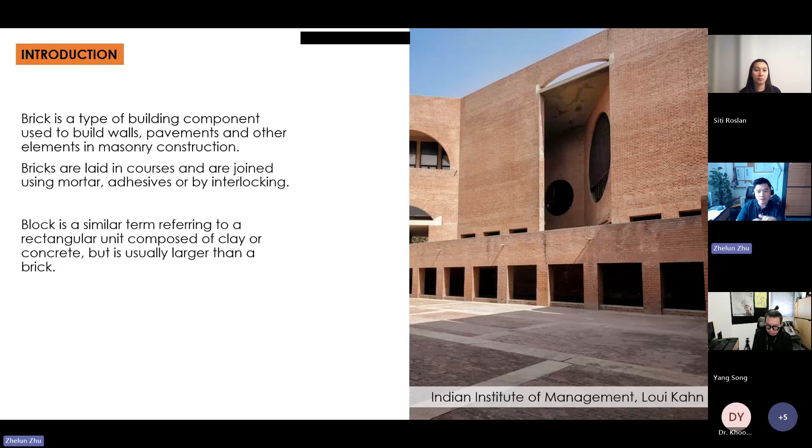Mortarless brick construction is usually achieved via an interlocking system, and it has several advantages: increasing construction productivity, reducing construction time and labor, and consequently reducing construction cost. Because of its technological simplicity, mortarless brick construction is more appropriate for many local communities than conventional mortared brick techniques—as you can imagine from the Lego system, how easily it can be built, or how we can have fun putting together these small pieces.

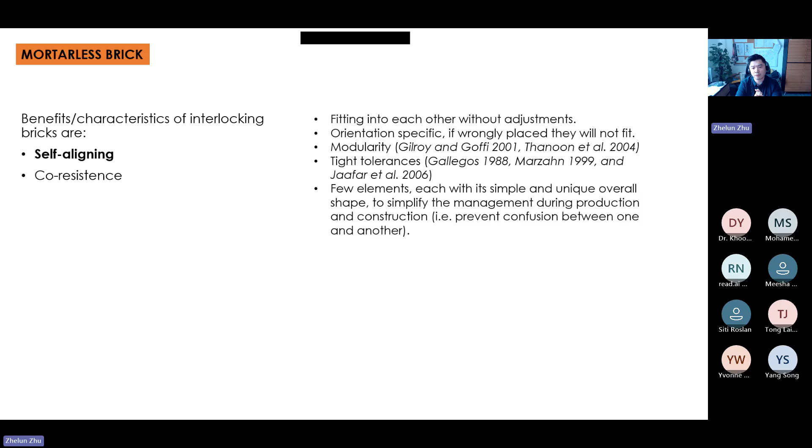Benefits and characteristics of interlocking bricks are self-aligning, so they can fit to each other without any adjustments, and they are orientation specific, so they will not fit if wrongly placed. They are usually modular, and have very tight tolerances. Usually they feature few elements, so you will find a lot of similar elements, because in the interlocking system and mortarless mechanism, we need to simplify management during production and construction, for example to prevent confusion between one and each other.

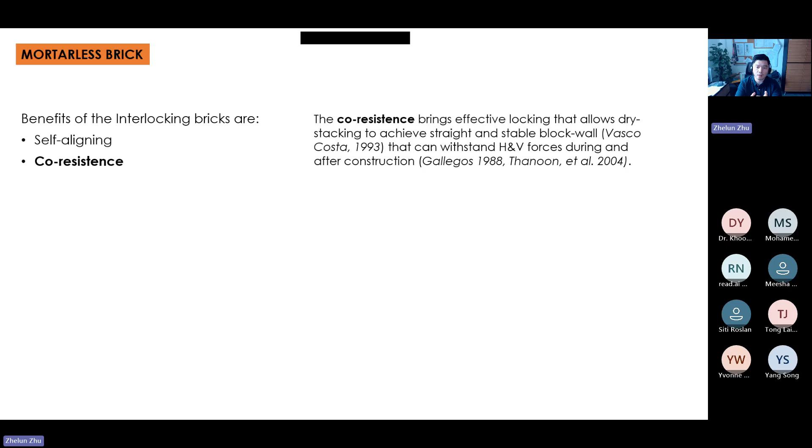On the other side, they feature co-resistance, meaning the effective locking allows dry stacking to achieve a straight and stable block wall that can withstand vertical and horizontal forces during and after construction. So all the bricks are interlocked together, they work as a system, they collaborate to bear all the loads. This is for co-resistance.

We have also many explorations of interlocking systems, and this is done by Dr. Hao Hua from Southeast University. They have designed small types of blocks, and they interlock to each other with this mortise and tenon system to form a wall.

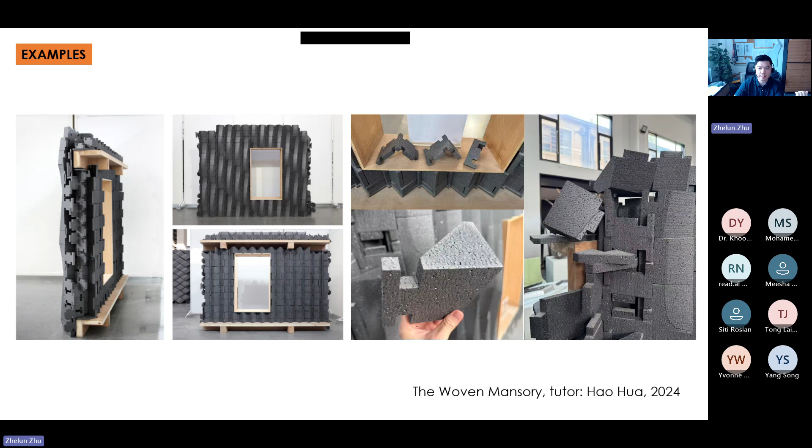We also have many modern architecture examples using interlocking systems, and this case is the Metropol Parasol in Seville. In this case they adopted a waffle structure to combine these panels together via interlocking system.

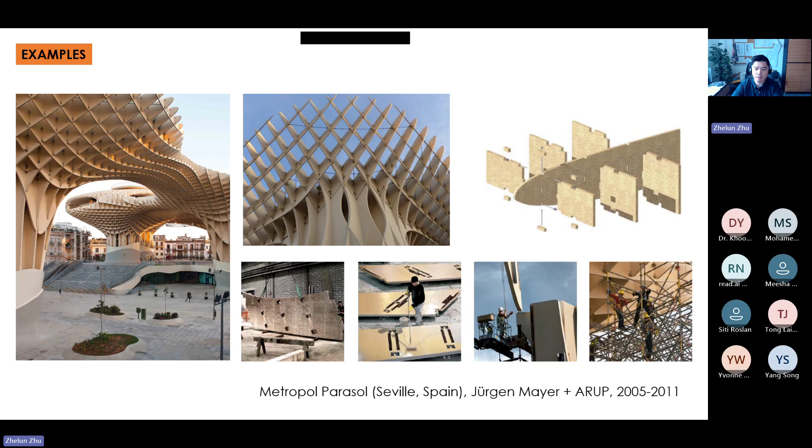You can see the shape - the overall shape is quite ambitious, but each component is quite simple, as their panels, and they use a digital fabrication process to shape these complex curves. These are more examples of interlocking systems via waffle structures.

In terms of application in space, it's really interesting that we are exploring how we are going to build in this extraterrestrial environment, and how we can use in situ materials like lunar dust to 3D print building components. This is an example from Norman Foster and Partners for the Moon Village.

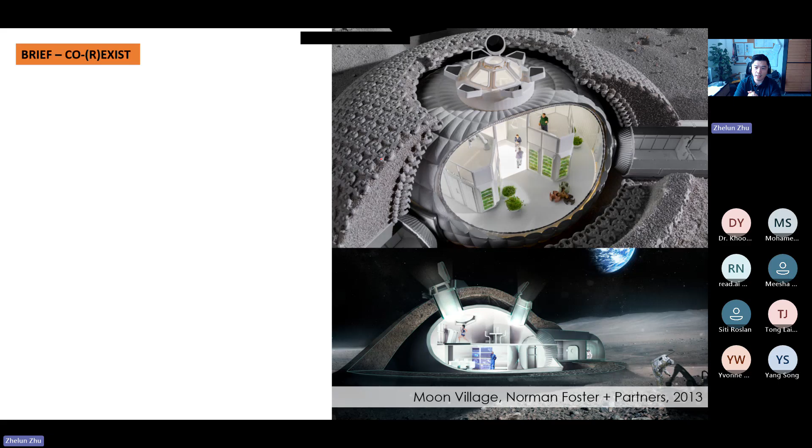They are trying to use 3D printing to build small elements, and as you can see, they can interlock to each other to form this shell for future space settlements. This application of using traditional techniques via modern construction strategy is actually very cutting edge and has a large application.

So what we have done in the last semester at XJTLU is we asked students, in particular in my groups, to design an integrative system formed by interlocking bricks via digital design and fabrication process. Students designed and built a pavilion, approximately 3 by 3 by 3 meters, using this system, so all elements must be geometrically interlocked with each other.

We asked students to use hot wire cutting of EPS panels, using the equipment we have here in the Department of Architecture, in particular a 6-axis robotic arm, and hot wire equipment of size 65 by 45 centimeters. So the EPS panel material is of maximum size 1 meter, and 60 centimeters in width and breadth.

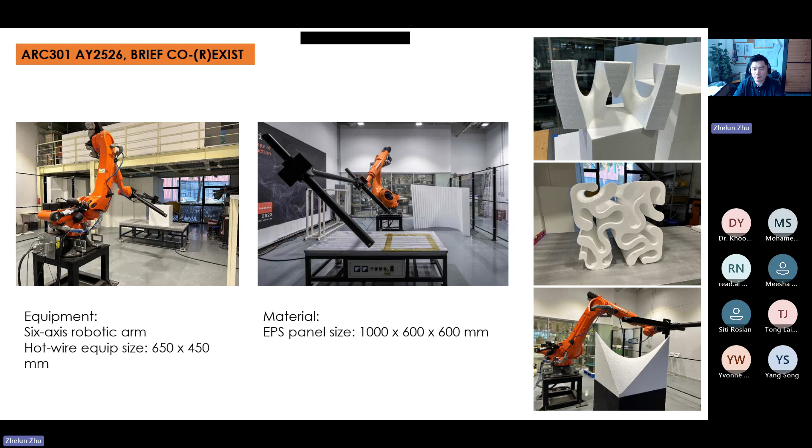Here are some examples of what the hot wire technique can do, and as you can see, we can shape different and very attractive forms using these techniques.

So you can see all these groups work with each other, similar to real construction groups, and they need to establish regular meetings with each other to check progress and communicate what is affecting who.

So here are the results. We start with the material study - we investigated the EPS panel material, exploring the density, mechanical properties, maximum load bearing of this material, as well as comparison with other materials, and the benefits and advantages that this particular material can bring.

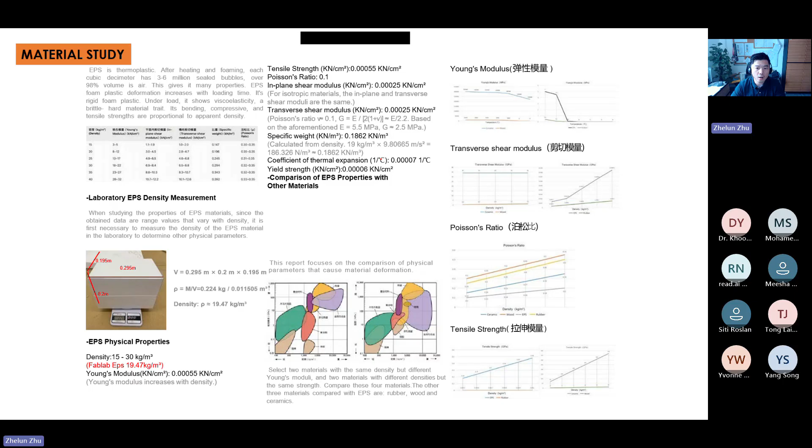We have also investigated different mechanical and structural performances of the material, checking the maximum load-bearing performance of this material in order to design an appropriate shape for the proposed system.

Students also run a case study with similar materials or other shapes. In particular, we explored the traditional tenon-mortise system here in China, and from it we extracted inspiration for our interlocking system.

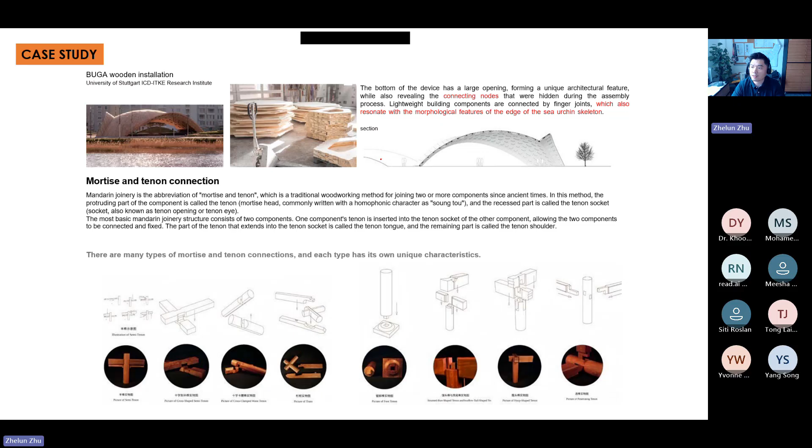So here is the digital fabrication process. What is the max precision, and how can these bricks be produced in mass without cutting each other, which would be waste and a lot of effort in terms of energy and material?

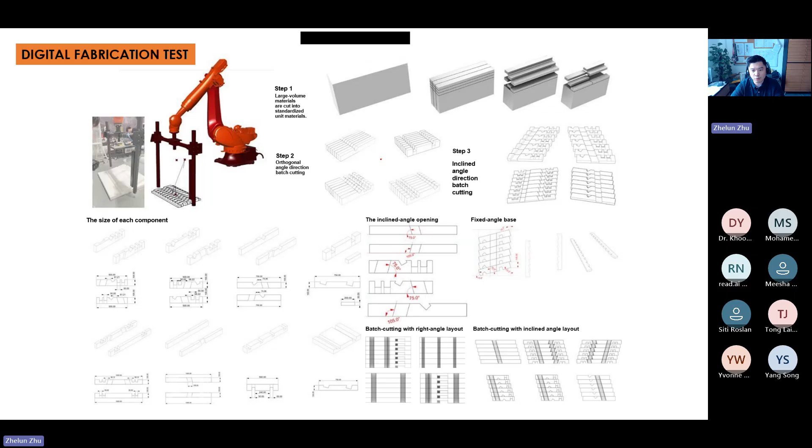So we explored a different way to cut all the bricks at the same time, since they are modular.

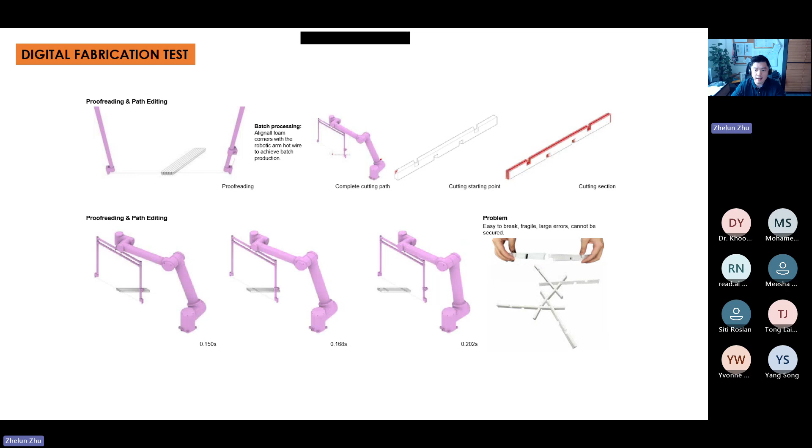We have also proofread the path editing, and resolved the problem of errors during the production process, and how the final bricks can be optimized for small pieces. For example, during production we noticed that we cannot cut very small openings, otherwise the material loses structural performance at that point.

So this information was communicated with other groups, for example the group in charge of the brick design, and they consequently adjusted the openings of the bricks.

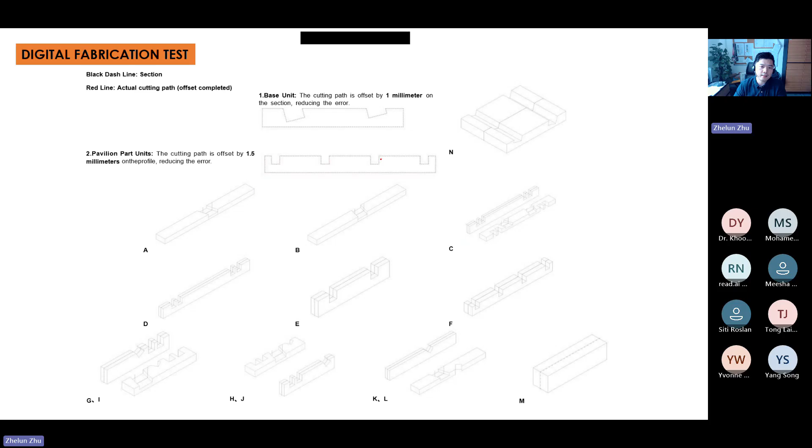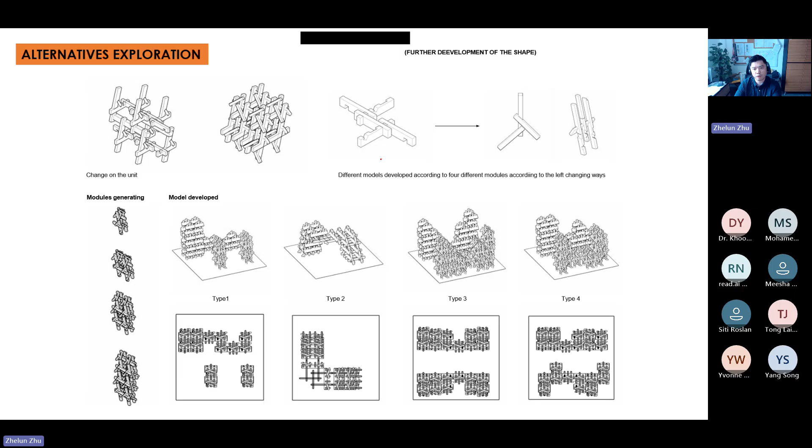Here are different shapes and different paths to edit the blocks of this pavilion. We also have different alternatives of shape, since all the bricks are modular, so the entire pavilion can have different shapes and alternatives in terms of aesthetic representation.

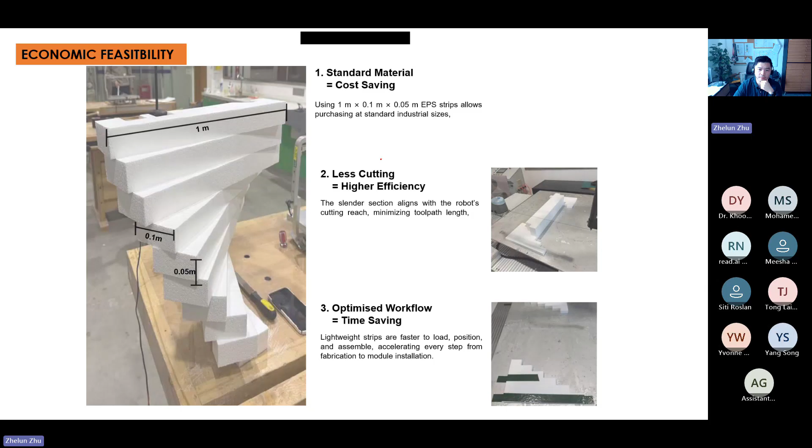During the process, students also had a chance to notice communication with the supply chain. We found we can directly require a specific shape of blocks with the same depth we require, which brings benefits in material saving, less cutting in our lab, and optimizing the workflow.

This is a comparison if we cut each piece from an initial one meter block, which produces a lot of material waste and is not economically or sustainably feasible.

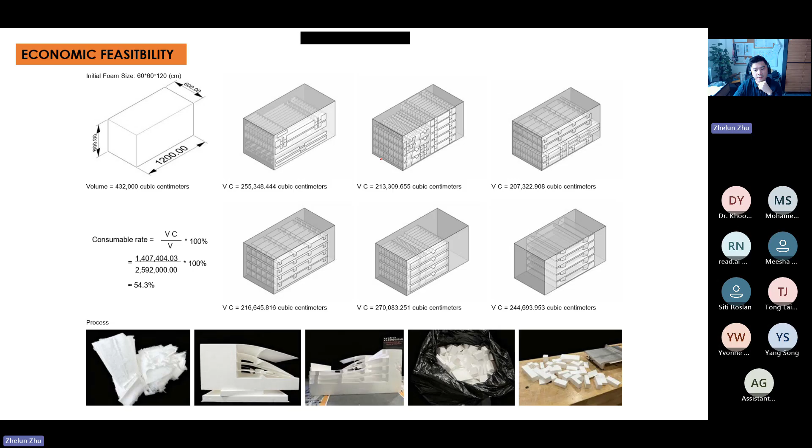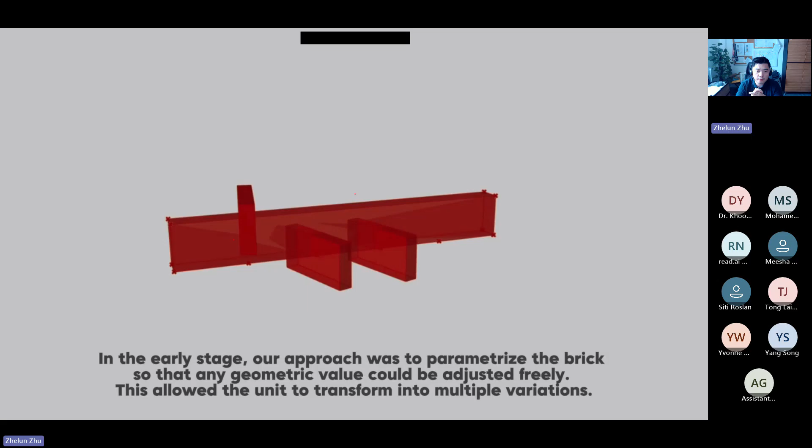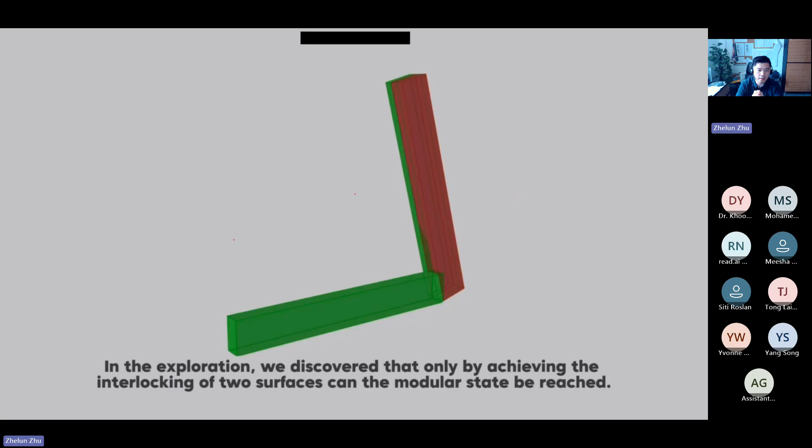This is the initial process. We designed all these blocks using a parametric design approach, meaning all the parameters and sizes of the bricks can be controlled, customized, and shaped as needed. This is the designing and exploration of the small components.

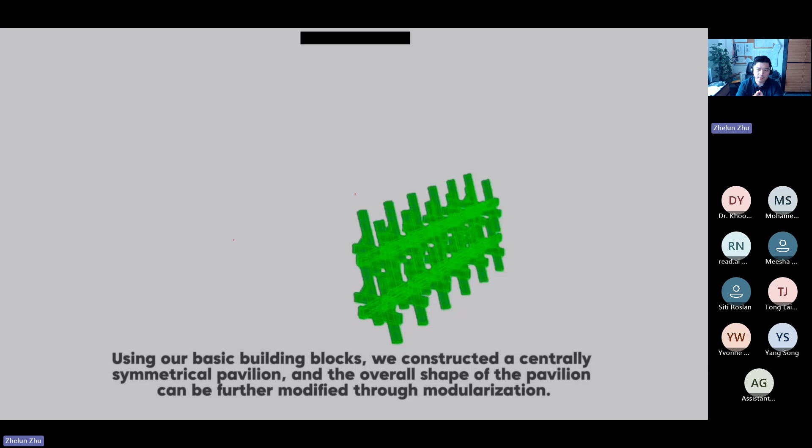We avoided carving too much into each block to maintain structural resistance. Here is the modular system.

This is the design process. We tested the overall structure with a digital design tool, in this case Karamba, and this is the simulation of the cutting.

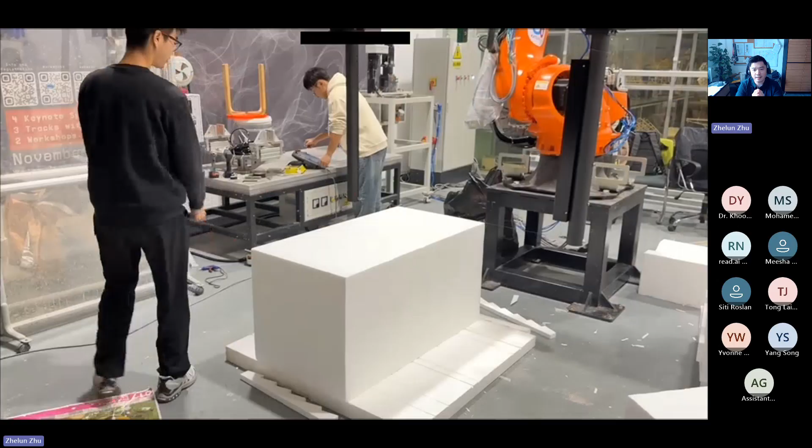Before we actually cut each component, we ran a simulation on a digital platform to test and validate the process. This is how we cut all the blocks in mass instead of one block at a time.

Here is the fabrication and assembly process. We labeled all the components and split them into areas, then followed the assembly manual to put all the pieces in the correct position. The process was actually quite fun.

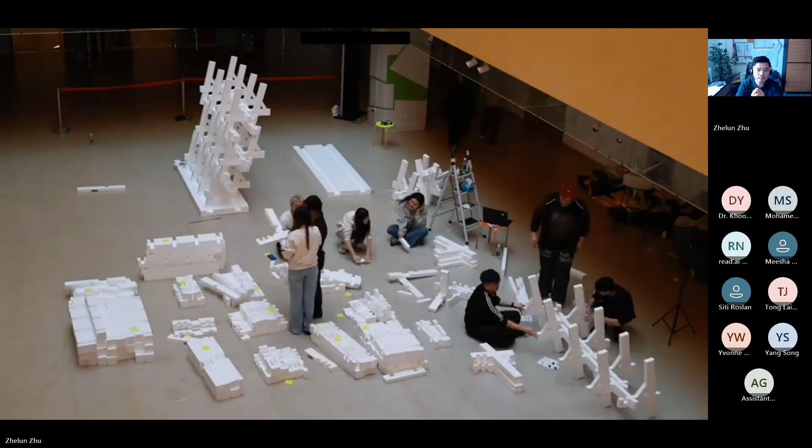Our team collaborated together to build the blocks with single parameters, while another group worked to put the blocks on the pavilion, so the entire process was very efficient. And this is the final top view of the pavilion.

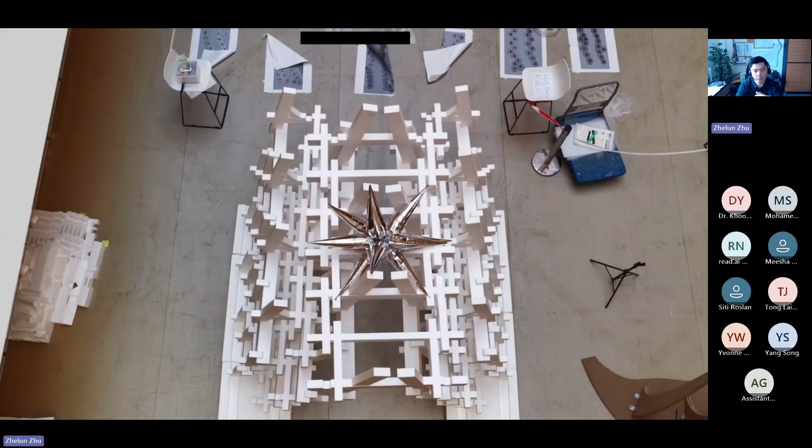Here you run with a drone to take some pictures of the pavilion from different angles. And that's all for this small experience.

The next part is the introduction of our Fab Lab. We would like to have you during the summer in our fantastic campus for this workshop. I would like to introduce our Fab Lab, what we have, the equipment that we have, and we hope that we can have some very nice projects and outcomes from this.

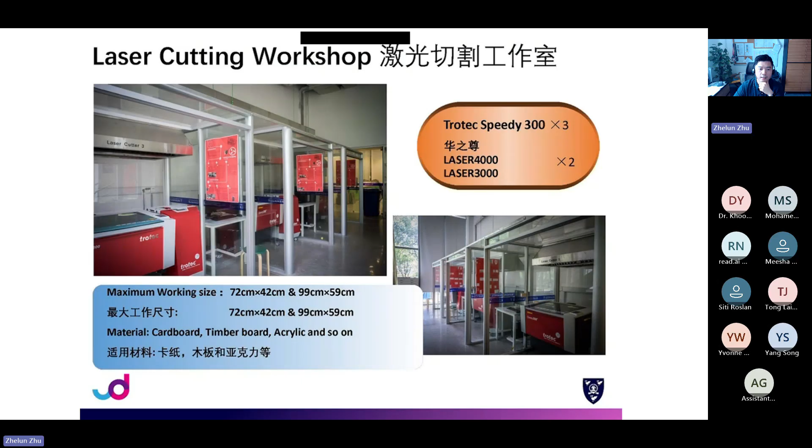Starting with the laser cutting workshop, we have 5 laser cut machines, and we can cut cardboard, timber board, and acrylic. Here are some effects. So you can just have a DWG file and label the different depths with different layers, and we can have the laser cut of different effects.

We have also the laser cut for metals, and as usual, you can just have the DWG file with different line properties properly labeled, and we can cut iron sheet, steel, aluminum, and copper. The maximum depth that you can cut is 2 to 3 millimeters.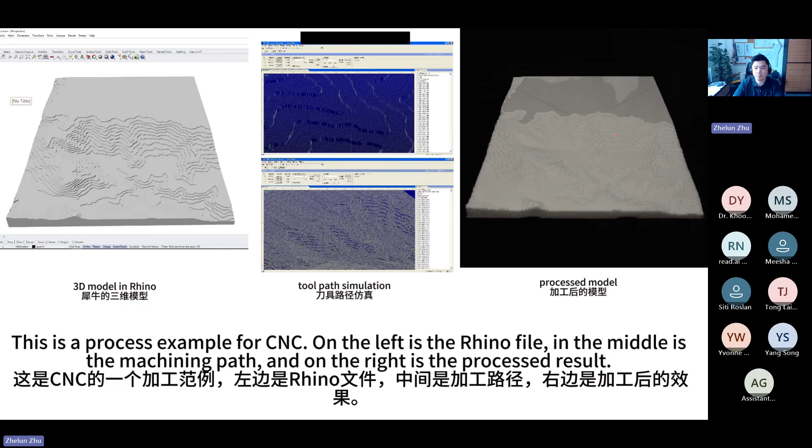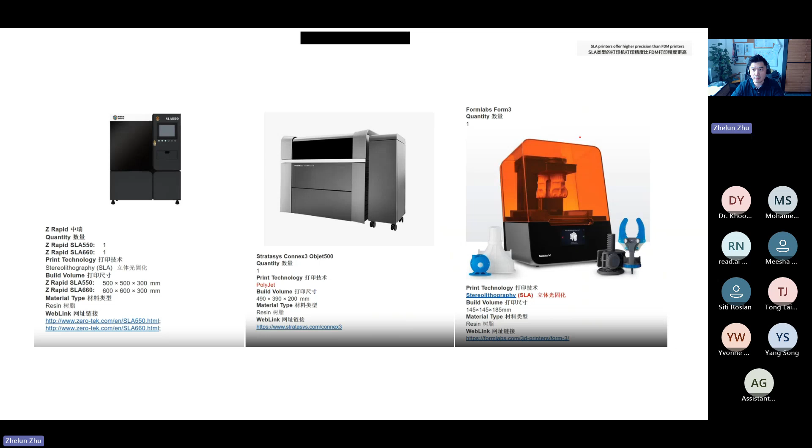We have in total 26 FDM 3D printers. They have different parameters, different sizes, but we have also several stereolithography 3D printers, and they are usually more precise. They provide more precise outcomes than the FDM printers, but they require more time.

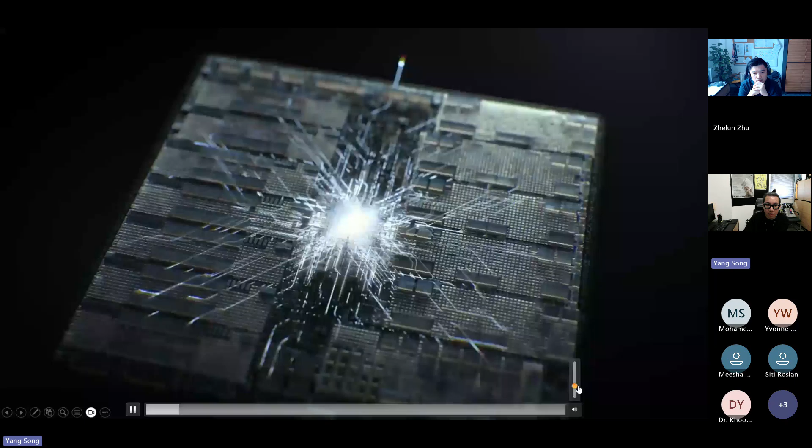These are the most popular devices if you're interested in immersive experiences or immersive visual guided fabrication. You might use these kinds of things later. The devices we currently use at XJTLU are the Microsoft HoloLens and the Meta Quest. Here is a quick demonstration from the Microsoft HoloLens team about this very famous goggle.

You can see this goggle contains several cameras inside, and also a very unique projector, shown here on the screen. This can give you a hologram projection, using reflection to project it in front of your eyes.

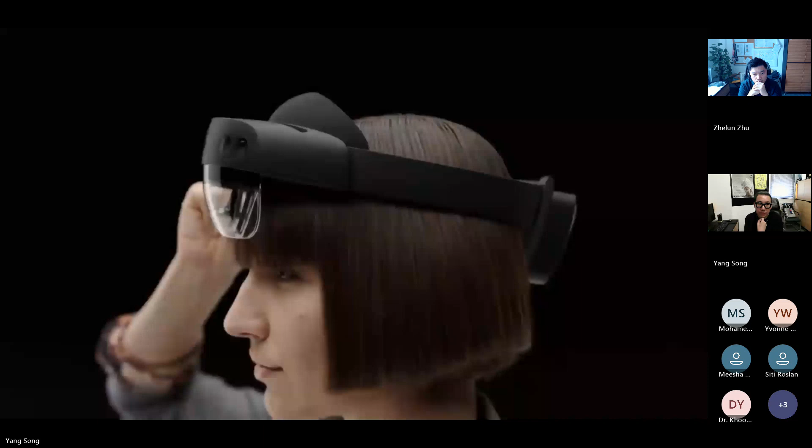So what you can see is you can see all the digital information through these transparent goggles, as well as you can see the real physical world. At the very beginning, this device is widely used for some industrial design, where you can see the elements information with the element itself just in front of you.

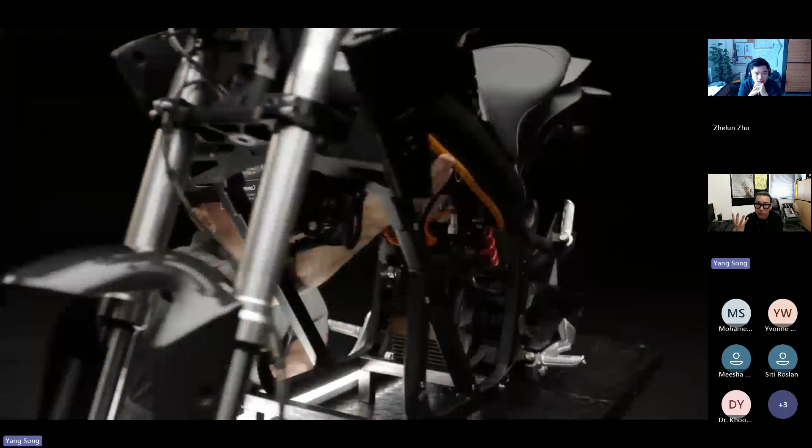And then later, this kind of technology has been widely used for some medical surgery experiments, so they can do this kind of simulation or practice before they actually do the physical surgeries. And currently, this device is really popular for immersive theater, as well as for some immersive museums.

To create more dimensional feelings about the content. So with this kind of advantage, as well as the properties, architects are trying to find the advantages and apply this into architecture fields. These are some very popular fields that architects or researchers would like to try the immersive technology into architecture fields, and I have tried some of them as well.

So they are immersive design, MR construction guidance, MR human-robot collaboration, as well as MR immersive experience. Later I will show you several cases that I did at XJTLU, which are under this kind of research field of applying immersive technologies.

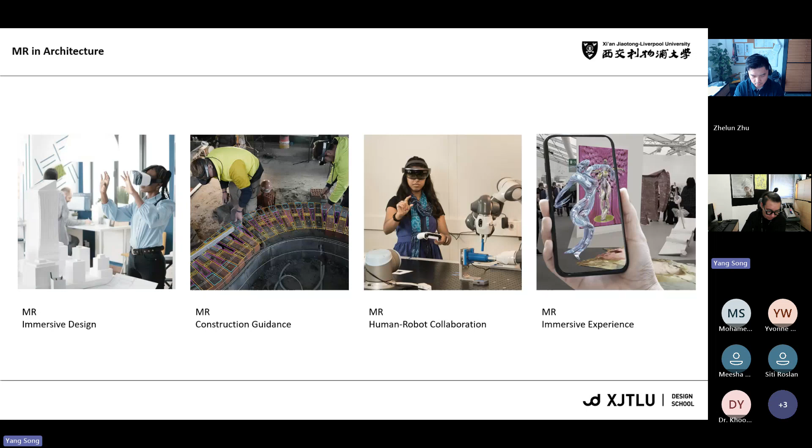So the first project that I would like to share with you is called Timber. We did it together with Dr. Zhelun as well, because this is the same course which we teach to year 4 students at XJTLU, and this course is called Architectural Technology. We are trying to use repetitive elements and a very simple connection method to achieve some temporary structure, quick fabrication, quick assembly.

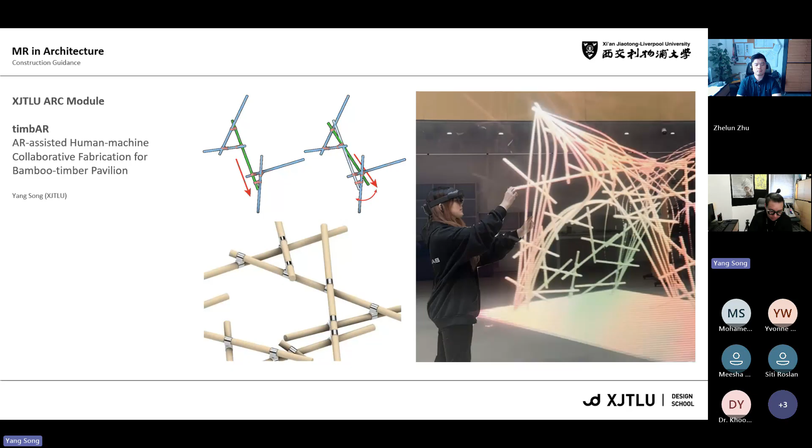But by giving the student this kind of technology, they can actually feel and see the whole space at a one-to-one scale. It gives the student more feedback to modify their spatial design to the next level. So this is the very initial idea of why we are applying this immersive technology to this course.

Not only for the design process, but also we are applying the immersive technology into the fabrication part. During the fabrication process, the students wear the goggles and achieve the whole complex geometry shape fabrication. What they can see, on the right-hand side, is the red color highlighting the wood bar, and what they need to do is wear the glasses and place the wood bar there and fix the connections.

By this kind of method, especially for creating very complex duplicate double-curved surfaces, it really saved their time as well as increased the accuracy of the final outcome. Because with the conventional method, we need to measure them and convert all the information from the 2D documents, then translate that into a 3D physical space and measure and fix them.

That is a kind of time-consuming process, and we cannot promise the accuracy of that. But wearing the augmented reality goggles, they can actually see the elements on set. So what they need to do is just follow the hologram, place the wood bar and fix it. It's a very quick method because they can actually see the 3D model on set, and all they need to do is place and fix.

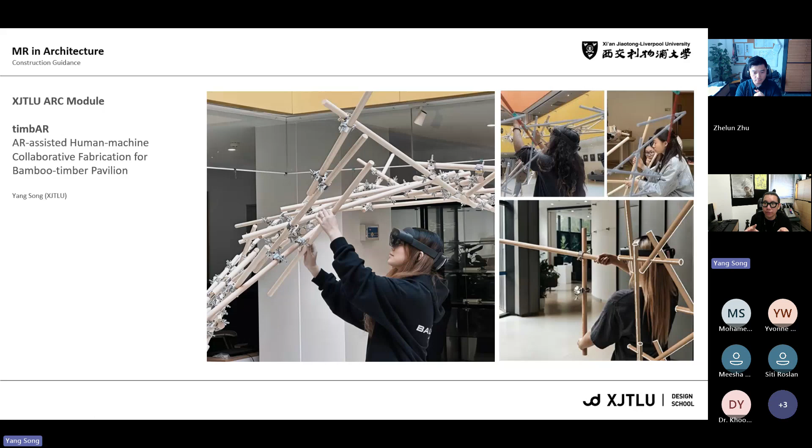We had around 300 pieces of connectors as well as 100 pieces of wood bars. So compared with the amount of materials as well as the complexity of the shape, you can tell how efficient this AR system method is, right?

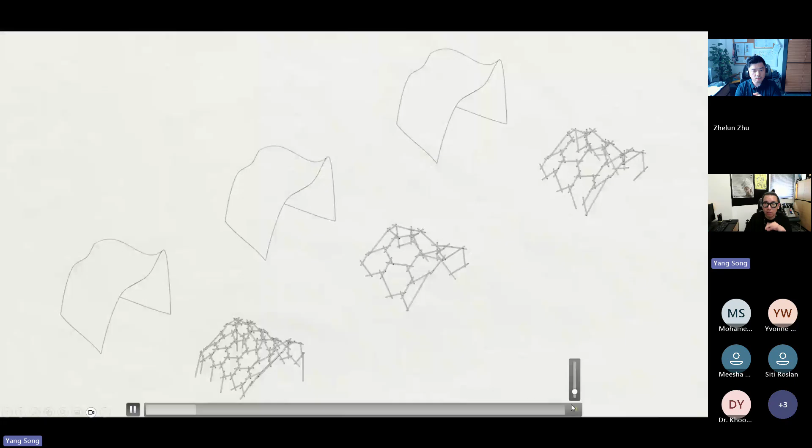So here is a video that demonstrates this process. You can see at the very beginning, we did several different double curve geometry studies, and then we applied our method there. We also did the simulation in augmented reality, and this one is a simulation of the assembly sequence.

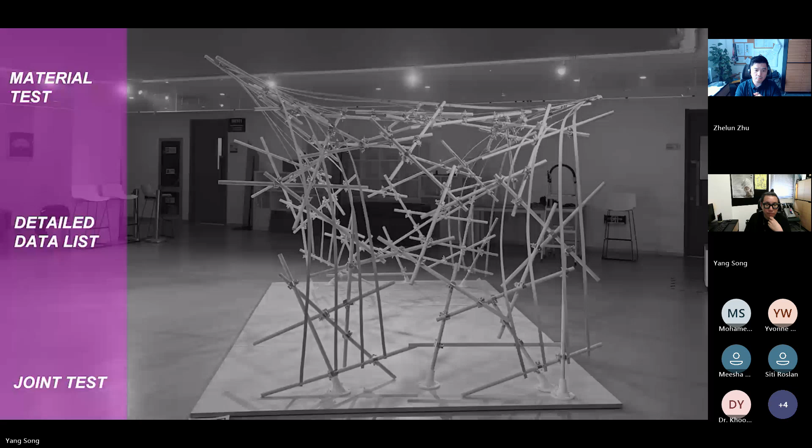Before we did the physical assembly, we actually did several material tests to make sure that this material can achieve whatever we want from the design process as well as from the fabrication process.

These are the materials that we prepared for this pavilion. You can see everything is standard with the same length, and the connectors are also standard. So it will be really easy for us to do full speed fabrication for, let's say, temporary structures.

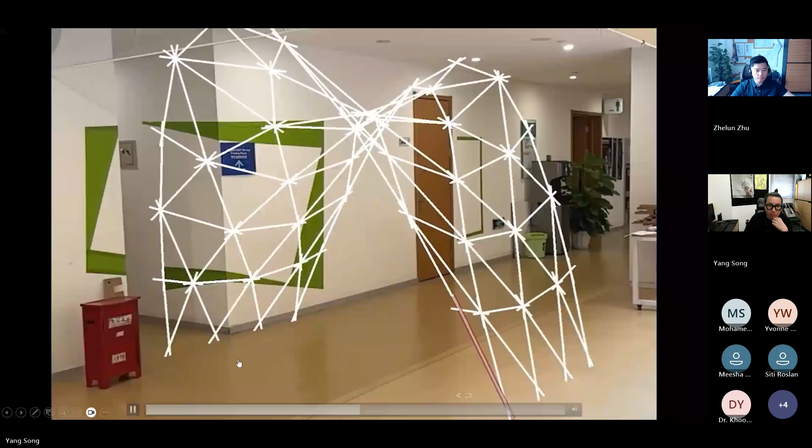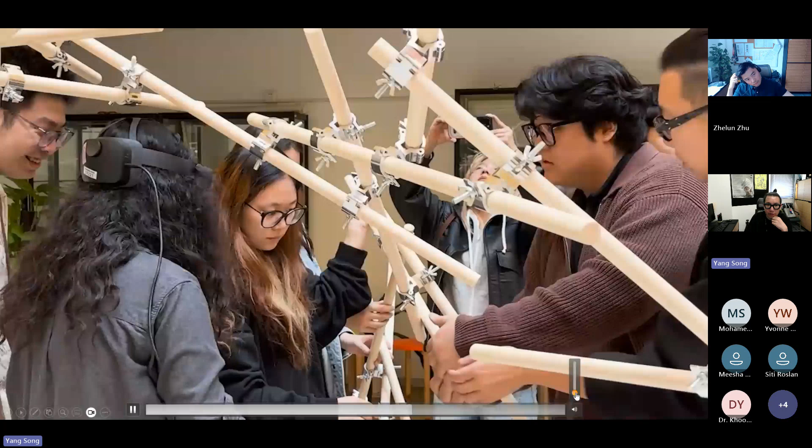This is the assembly order rehearsal in the AR environment. After the students know how to assemble and know the assembly sequence, they will do the full speed assembly with the guidance of the augmented reality method.

And also at the very end, we add this kind of bamboo strap as a decoration to cover this whole wood structure.

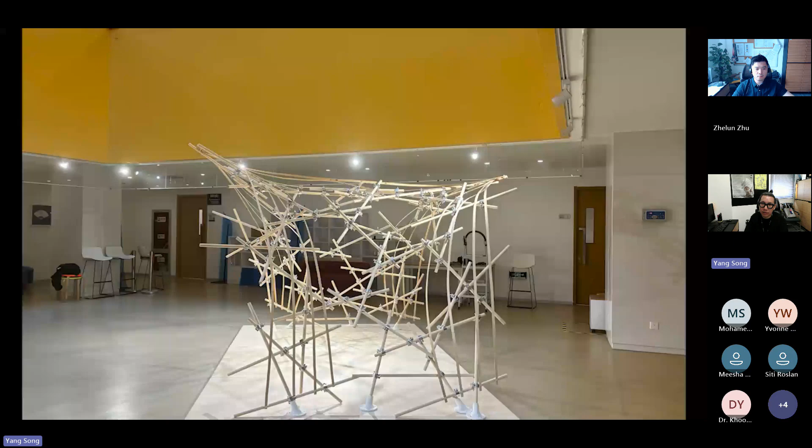This project explores how to do design and fabrication with the help of augmented reality. We also got really great feedback from our students, who felt they had more understanding of their space design before the physical fabrication outcome showed up. They really enjoyed the fabrication process because they couldn't believe they just used goggles and their hands to build such a complex geometry shape.

So not only are we applying this immersive technology to year 4 students, we also apply it to lower level students from year 1 and 2. This is another workshop that I did together with my colleagues Mona, Juan Carlos, and Gergely. We created this kind of shelter design for year 1 and year 2 students. You can see all of this design is connected back to Grasshopper.

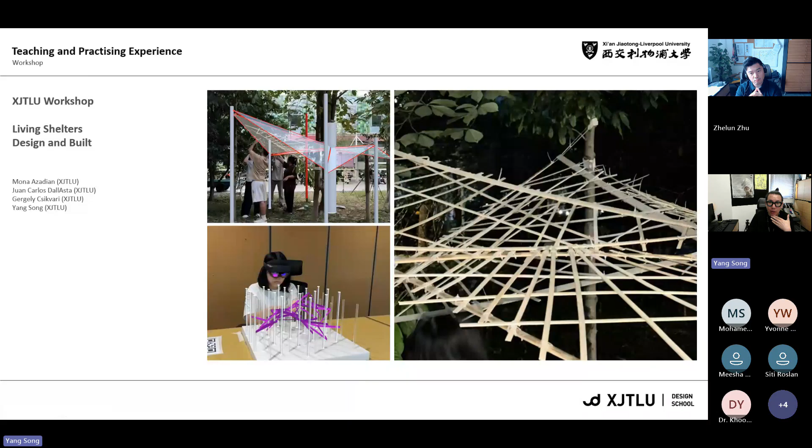The students have this 1 to 50 model, and they can do their design on the model and change points in AR. After that, we send all the digital design into the real site, so they can wear the glasses to feel the spatial quality of that. At the very end, we fabricate it at real scale. So this is also a kind of very preliminary attempt at applying this immersive design technology into our year 1 and 2 design studio curriculum.

Moving forward a little bit, me and my friend from University of Tokyo, Eri Sumitomo, did a workshop together. This workshop is a little bit different from the timber AR pavilion that you just saw.

So we are trying to use some recycled wood material and also add human-machine communication, human-machine interactions to the whole process. This workshop is called Wood Cycle, and it was held by CAADRIA conference in Tokyo in 2025.

So you can see these three images, they are a very representative image for this workshop. The student does this kind of AR assisted assembly, as well as the design. What's showing on the top right image is demonstrating the human-machine collaboration or human-machine communication.

The fabricator who is wearing the AR glass can actually see the target location. But remember, at the beginning we are trying to use reclaimed material, so the material is from nature. We only have one surface smooth, the other surface we are keeping the wood textures as it is. So the fabricator needs to think about which surface needs to be connected to maintain the whole structure stable. This is a kind of communication between our fabricator and our AR machine.

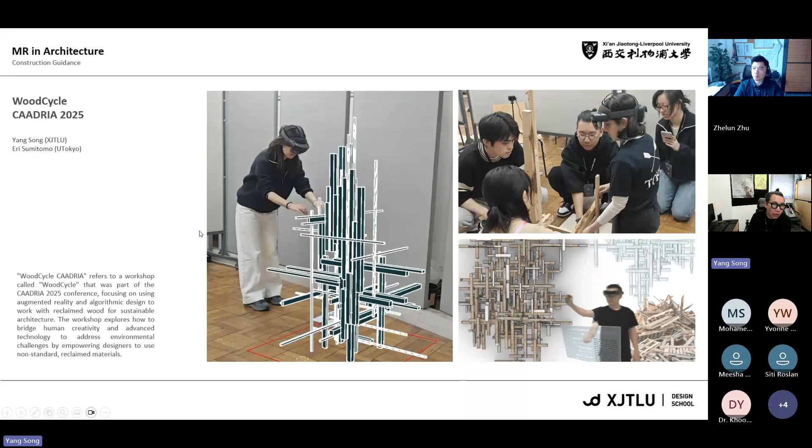We have 6 students for this workshop who don't have any AR experience, and we achieved this workshop within 3 days. At the very beginning of the workshop, we went to a forest near Tokyo, and we are trying to get some dead wood material to use for this one. We also use several materials from my friend's another project, which are the waste material from this project.

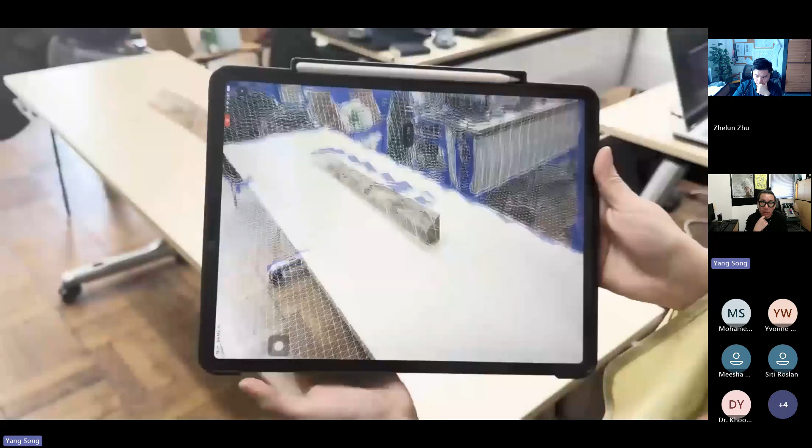After we collect the material, we are using the augmented reality method to do the real-time 3D scanning of them. So you can see we got this kind of digital twins and digital data for all the reclaimed material that we have. And then we did the categorization of them, trying to categorize them into 3 types.

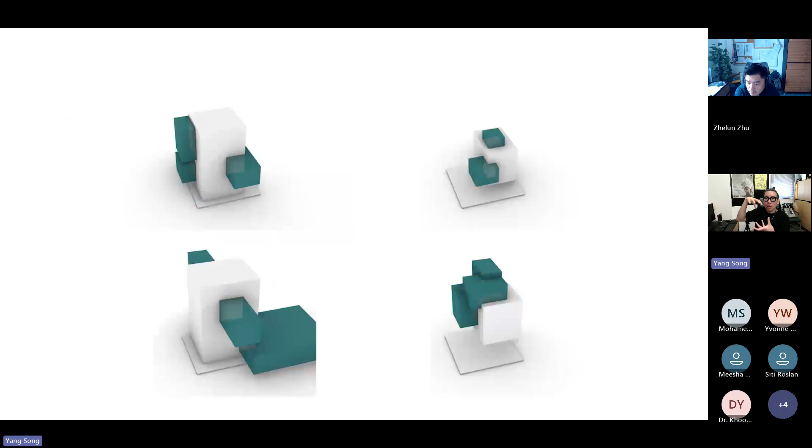After the material preparation, we introduce the student to this AR immersive design process. They are playing with the volume to create some installations. After the volume is sized, the volume is connected directly with the algorithms in Grasshopper, and this kind of wood component is generated automatically. Also, the student can change the shape of the wood in the AR environment.

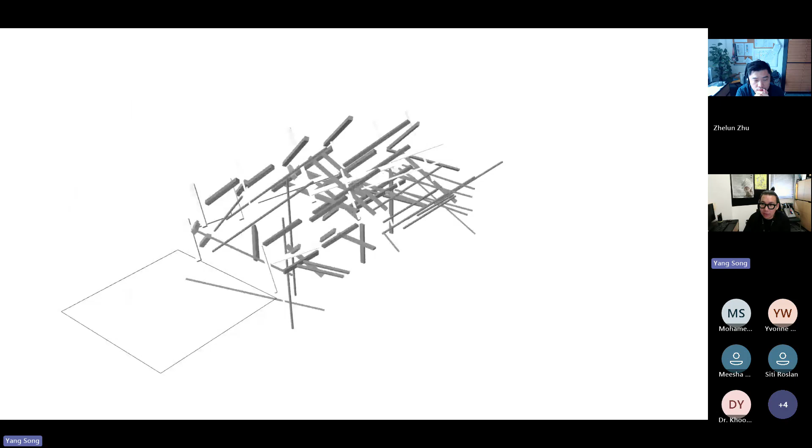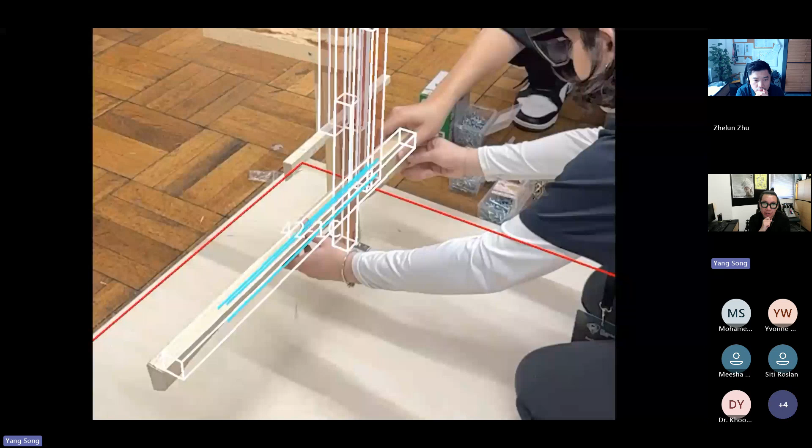After the design is finalized, we get into the AR assisted fabrication process. They can select the specific wood material that they have, following the AR guidance to finish the physical fabrication. During this fabrication process, the human worker actually communicates with the AR device, trying to find the perfect connecting surface.

This is the final outcome of part of this installation, and this installation was exhibited with the CAADRIA conference. Because we only had 3 days to try our idea, we are currently developing this further into an architectural proposal for some walls as well as some columns.

There's another very interesting project that happened at XJTLU last summer. This was a summer workshop called Bamboo Fusion, that I did together with my colleague Leyuan Jiang, as well as our friend from AA Architecture School, Hanjun Kim, and Haotian Man from Hong Kong University. This workshop is called Bamboo Fusion, Augmented Architectural Fabrication, Crafting the Future of Architecture with AR and Robots.

It's like moving the previous method one step forward. We are adding the human-robot communication and collaboration to this workshop as well. We are trying to use the advantage from robots, which are the accuracy and efficiency, and also the advantage from humans, which is flexibility.

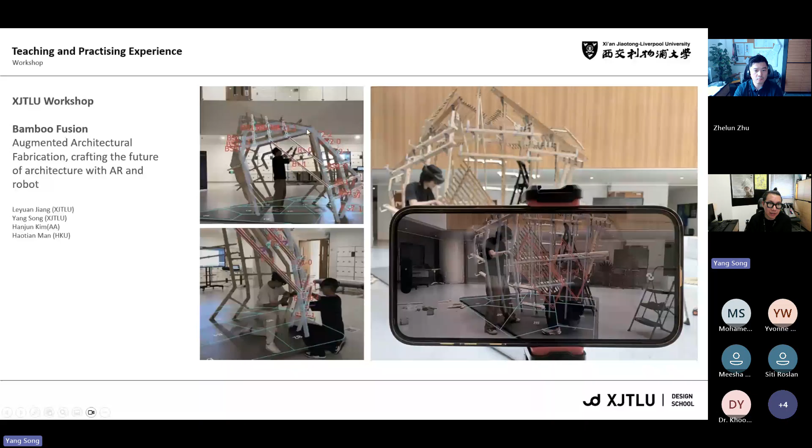Not only applying this human-robot collaboration method, we also involve our AR-assisted guidance for this workshop to apply more clearly visual guidance with all the index shown on that. We achieved this bamboo fusion pavilion within 1 week, including the design process, simulation process, and fabrication process at the end. You can see with the help of augmented reality as well as robotic fabrication, it really increased our speed for the physical fabrication.

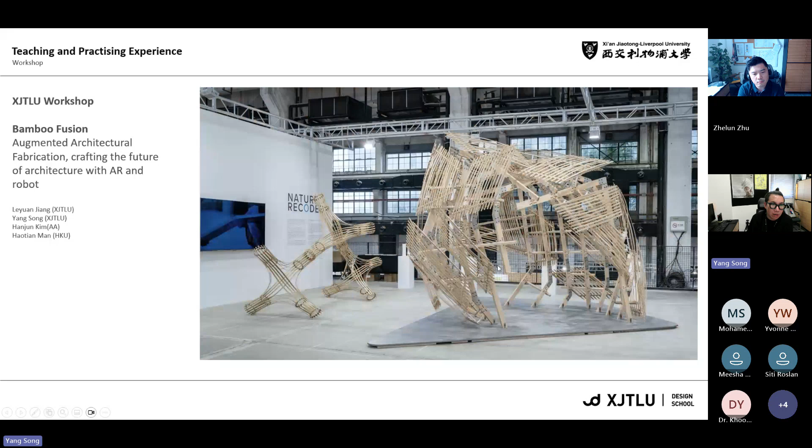Here is also a small video that demonstrates this workshop. We also exhibited this workshop several times. This is the Future Lab exhibition that happens in Shanghai.

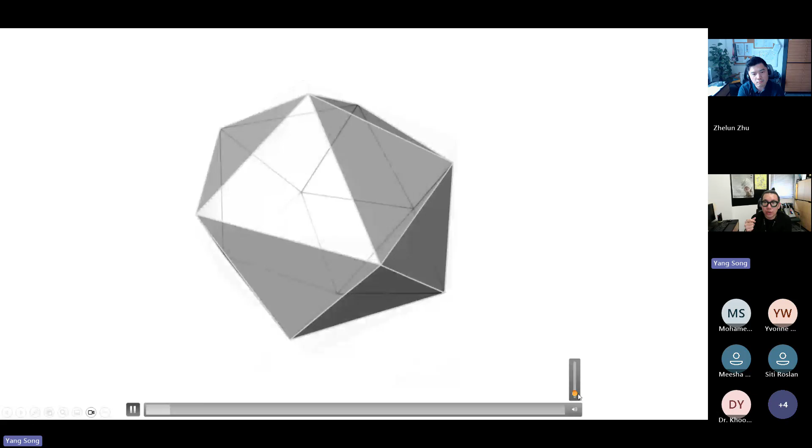So this is the video for the Bamboo Fusion Pavilion. We actually got the idea of the design from AI, and then later translated that into Grasshopper for the final design. You can see all these elements have different angles and lengths for the connection, so we couldn't send it to the factory for mass production because they can't do this kind of very customized design for us.

So our strategy was to introduce augmented reality methods as well as robotic fabrication methods to our students. In the first several days we did basic training of these technologies and a small workshop for them to warm up, and later we started the design process.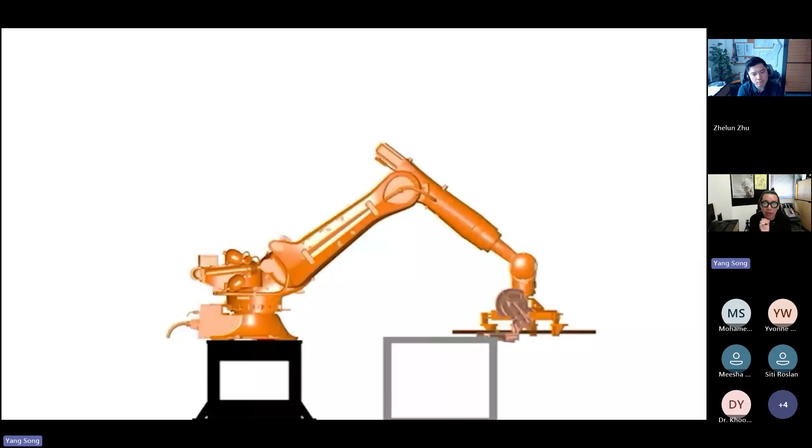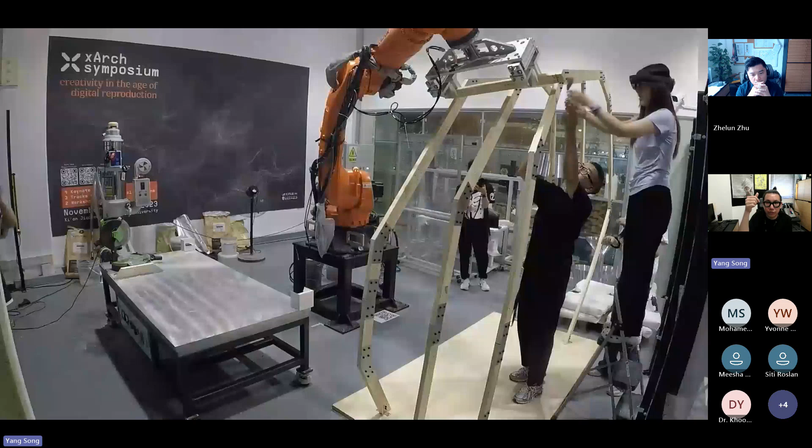The first part is the structural part, and the whole structure was designed in Grasshopper and fabricated by our KUKA robot, which was already introduced by Zhelun in the first session. The robot will pick and place the wood at the correct corner, we help to cut them, then the robot picks it up again to the correct corner, and our human fabricator wears the glasses to fix them. So this is a very straightforward fabrication workflow for this project.

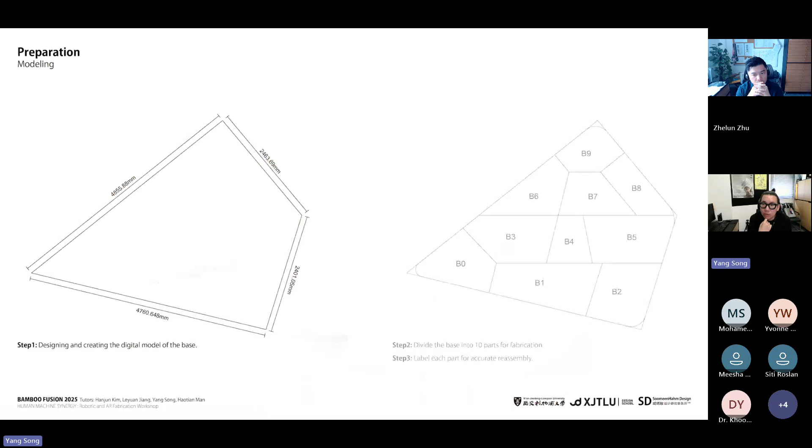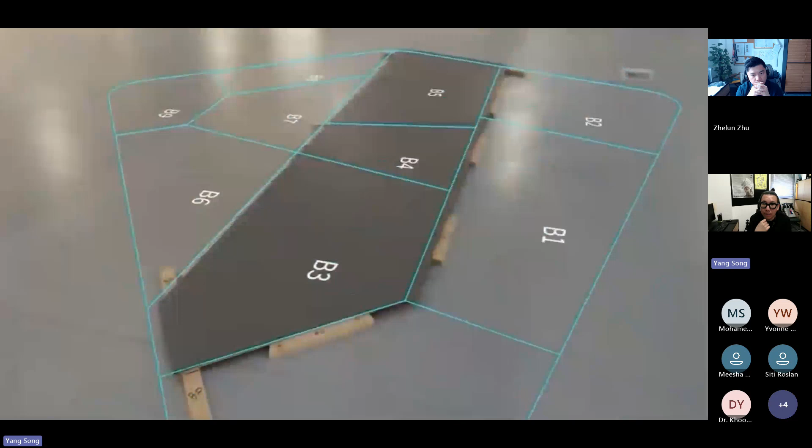For the bamboo surfaces of this pavilion, we combine the traditional Chinese bamboo tying methods. Our fabricators tie the bamboo strap with the traditional handicraft method and fix them on a frame, and we also need to bend them to make these surfaces. For the distance of bending the part, we are guided by the augmented reality method.

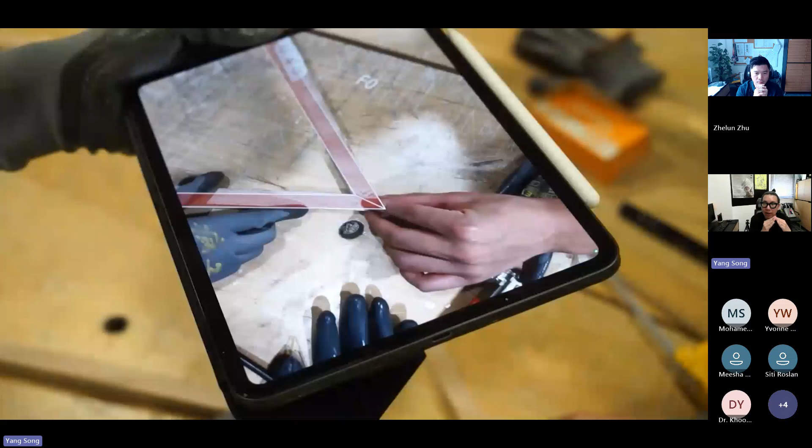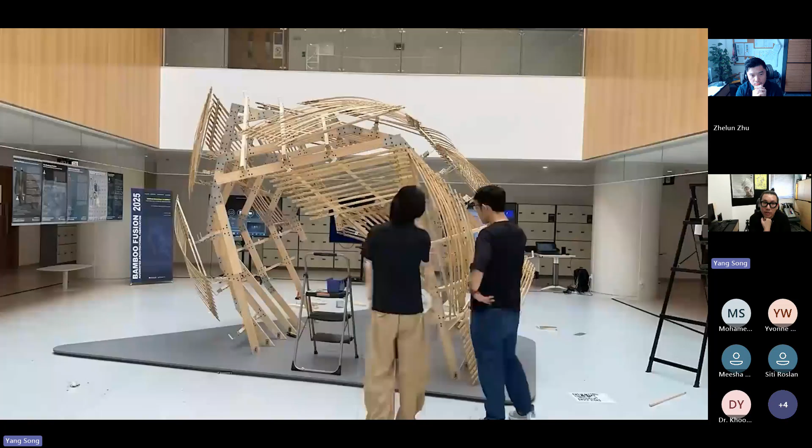These frames, we have 70 of them, fixing the shape of the bamboo strap surfaces. These 70 frames also have different lengths for each element and different connection angles, so we are also using the augmented reality method to fabricate them, to measure, cut and connect them together. At the very end, we attach different bamboo panels on the frames, and then attach the frames to the structure. This is the final result of this Bamboo Fusion Pavilion.

For the final fabrication part, we use 2 days for the final assembly part. So it's really fun.

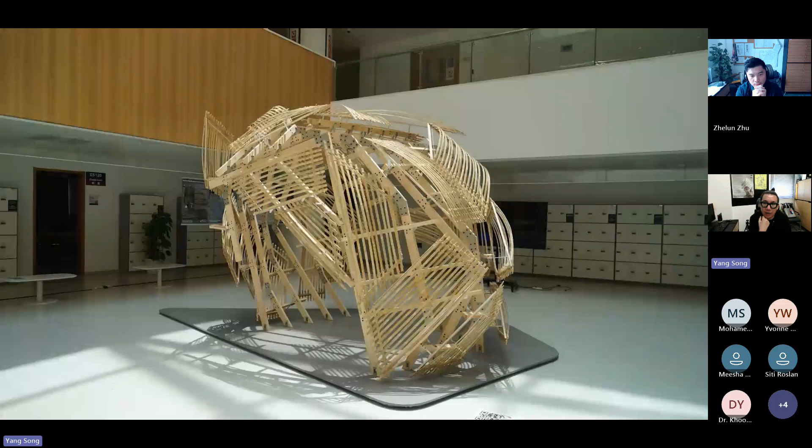So there are some very detailed views of the Bamboo Fusion Pavilion project.

Not only for this kind of digital fabrication, our department is also trying to explore immersive technology into the design as well as immersive experiments. This is a virtual exhibition project that I did with my colleagues Sylvia and Giancarlo together. This one was a virtual exhibition which collaborated with the Italian lighting company iGuzzini together, where we tried to move this kind of lighting quality into a virtual exhibition.

For this project, we used the Meta Quest 3 goggles to create this lighting feeling as well as the real lighting effect through the goggle devices. It's really convenient for our client to show this virtual exhibition hall around the world only with this device. So later we are currently trying to explore this VR experiment one step further.

We are right now doing the FYP final year project with some immersive museum design using the same technologies. After the final year project is done, I will be able to share more results of this kind of thing.

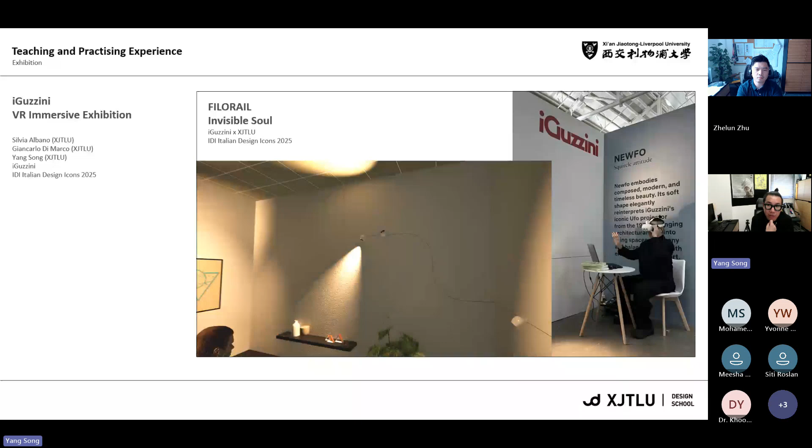I think I still have one more project to share with you. That project is not related to teaching, it's more facing the practice part.

So why did they choose this whale shark? Because the whale shark means friendly, means welcome, from their cultural background. So we came up with a really crazy idea about hanging this very giant metal whale shark in front of their Soho Center.

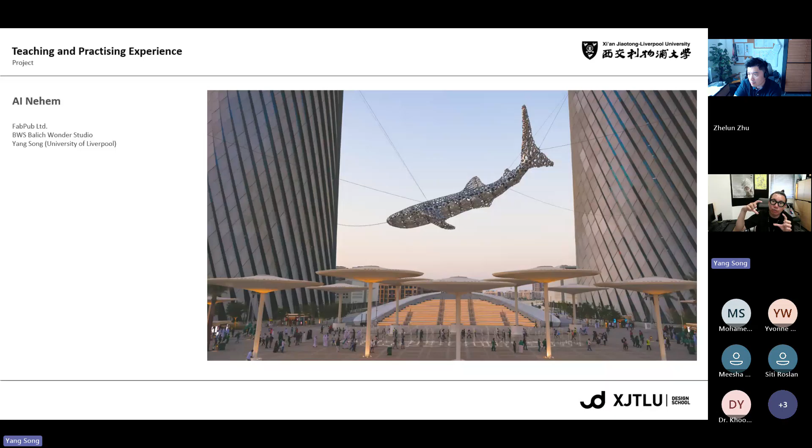The design logic is we cut this whale shark into different pieces, and for different pieces we used metal rebars, bending them to simulate the whole shape of the whale shark. These rebars became the skeleton, and upon them we attached several metal sheets to create the skin of the whale shark.

This is the AR-assisted fabrication recording for this art installation. Together we had 30 workers, and we worked together for 2 months, bending all these metal rebars manually.

In total it was around 3,600 pieces of metal rebars, and then we attached around 7,000 pieces of metal sheet.

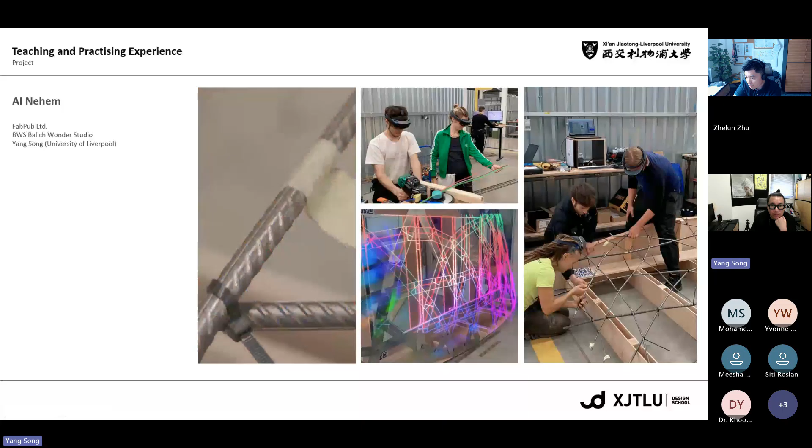On the left-hand side is a recording from Microsoft HoloLens demonstrating how we bend and fix it. On the right-hand side is the working process for one piece of the whale shark. You can see we fix it first on a wood frame, and then we weld them together.

In the middle is the metal sheet guidance in AR. We used the AR rivet gun to fix the metal sheet onto the metal rebars.

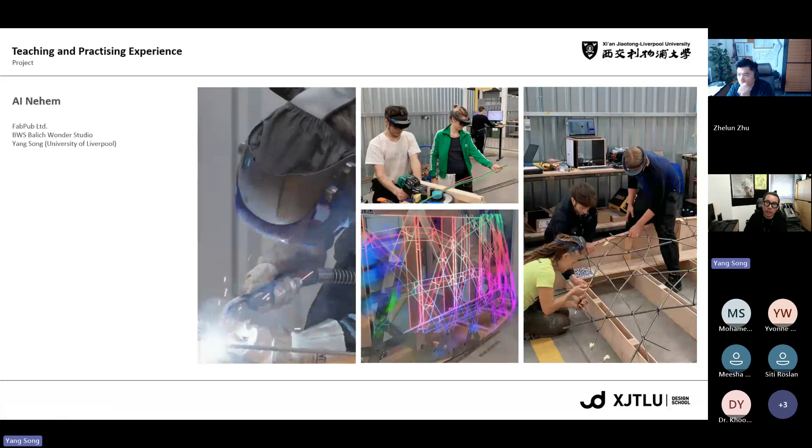This first image is the AR-assisted metal rebar bending process. The workers can see their rebar as well as their rebar target. What they need to do is place the rebar at the correct length and then press the toggle of the electric bender to bend it to the correct angle.

So this is somewhat the workflow of this project. Later, after we finished fabricating the pieces, we shipped it from London to Qatar.

On site, we welded them together on the metal truss behind it. You can see, compared to the real worker scale, how big it is for the welded truss tiles.

Here's a final video of the final outcome, and we also collaborated with a lighting company to add some light effects for the opening ceremony.

Projects like this would typically take about 2 years, and we had to conceive it, design it, procure it, construct it, ship it, assemble it, lift it, and then program it in about 3.5 months.

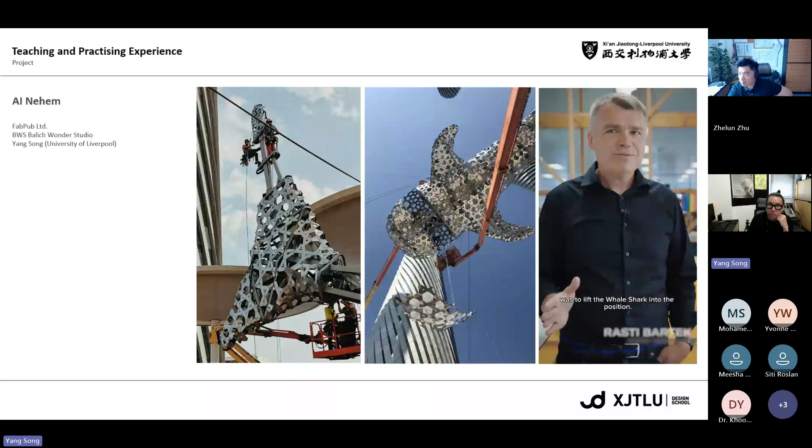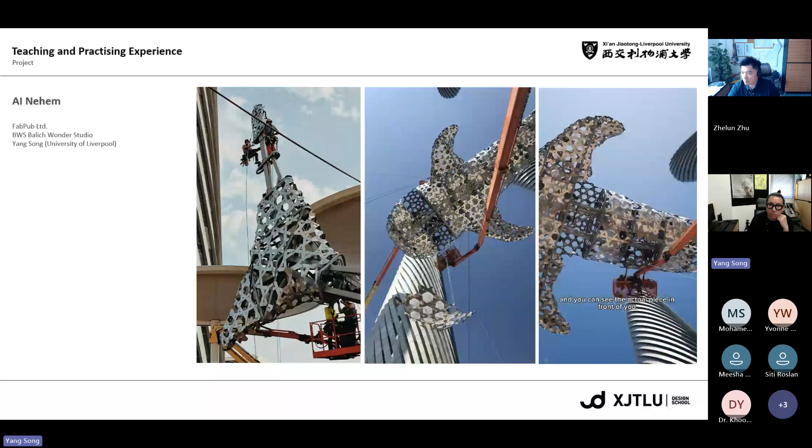One of the biggest challenges of the project was lifting the Whale Shark into position. He had experimented with a new technology. With the mixed reality headset, you can put on your glasses and see the actual piece in front of you. Those buildings were just not designed to support a 20-ton steel sculpture.

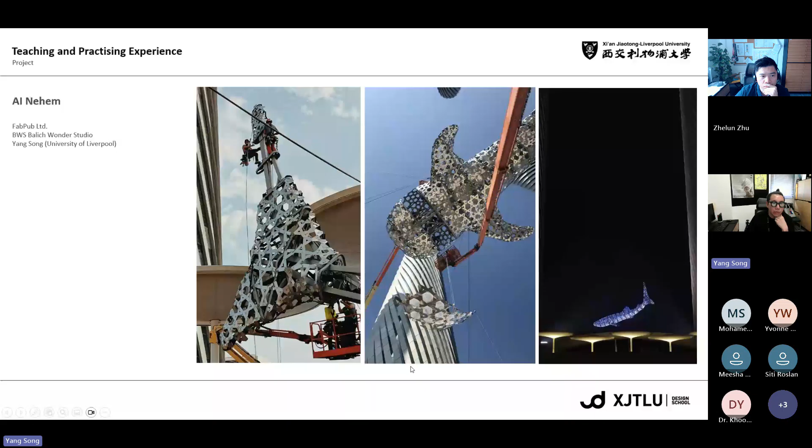I think both cases are special examples I wanted to share with you about my own mixed reality experiments for teaching and practice. I'm also open to research directions like immersive narrative, immersive design, building information visualization, immersive heritage, and human-robot collaboration. I feel this will be the future trend of our architecture.

Currently I'm trying to use different teaching and practice opportunities to explore these possibilities for the future. I think that's all I'd like to share for today's guest lecture. Later in the question session, if you have any questions, please feel free to ask.